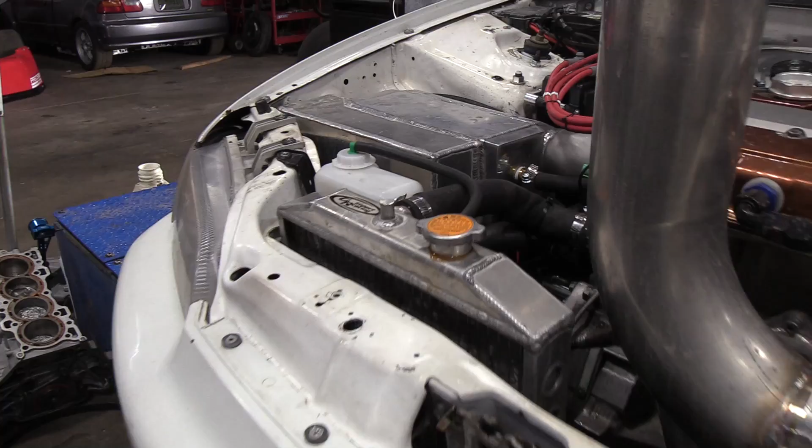Perfect. Like a glove. Yeah, I might as well just throw it in and try it. I mean, what's the worst that can happen? It not work? Oh, that thing's sick. It fits in there perfectly. Yeah, too.

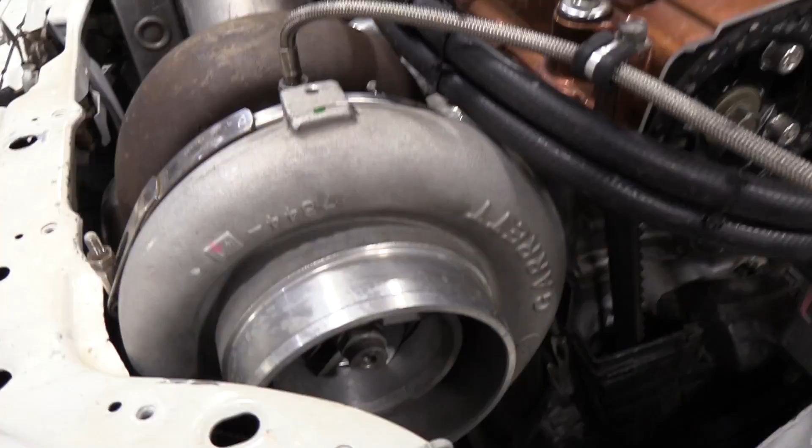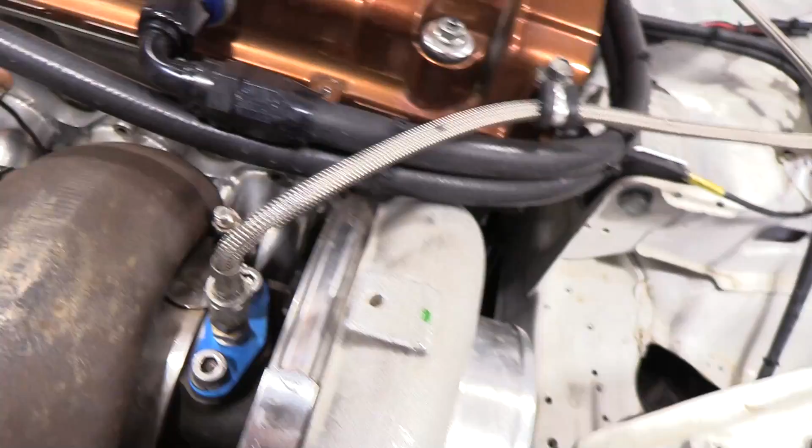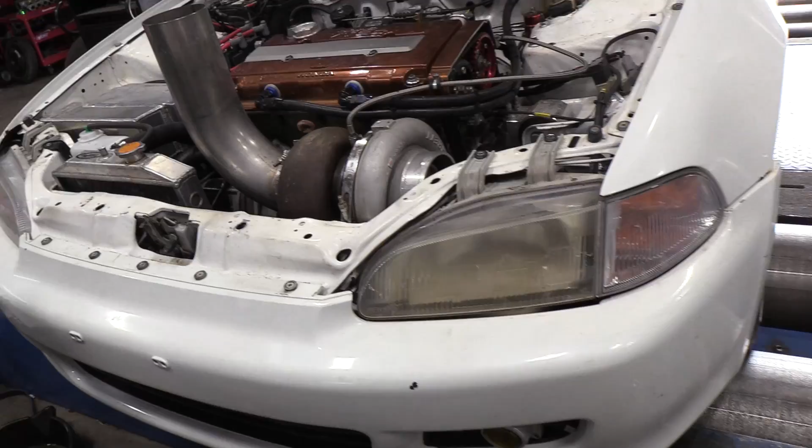I don't think I've ever seen such a big turbo on a top mount like this. If you look right there, you can barely squeeze a piece of paper between the header and the exhaust housing. It's tight, surprised it fit between the block and stuff right here. I had the T1 crank trigger bracket, had to switch to the De La Cruz one. Yeah, I had to clearance the hell out of mine, and I just have a GT35. But mine's in an EF, so I have half as much room from here to the motor. But yeah, that's cool. It's definitely in there, this thing's huge. That's what she said. The power ground. Yeah.

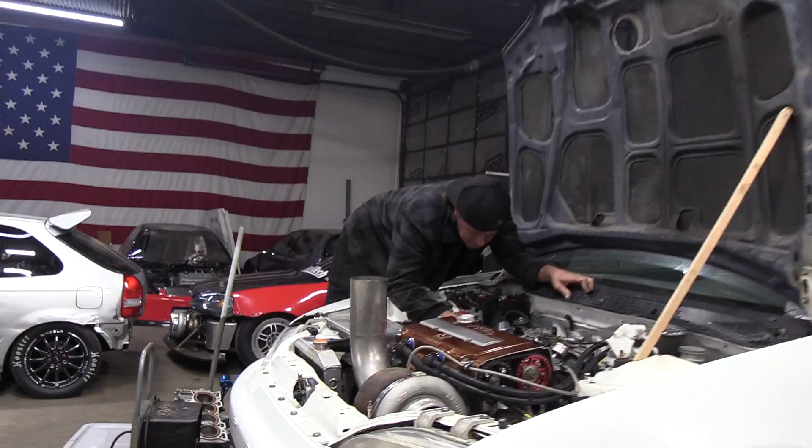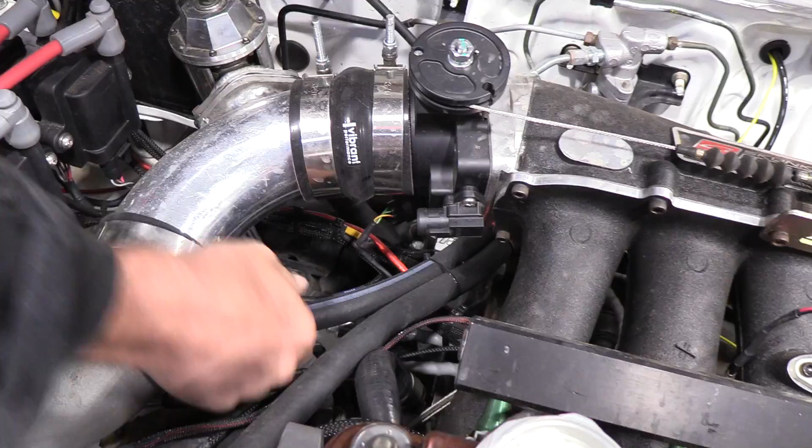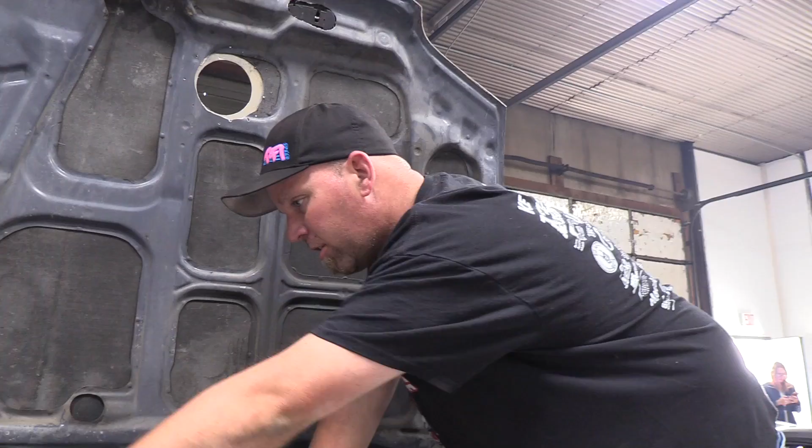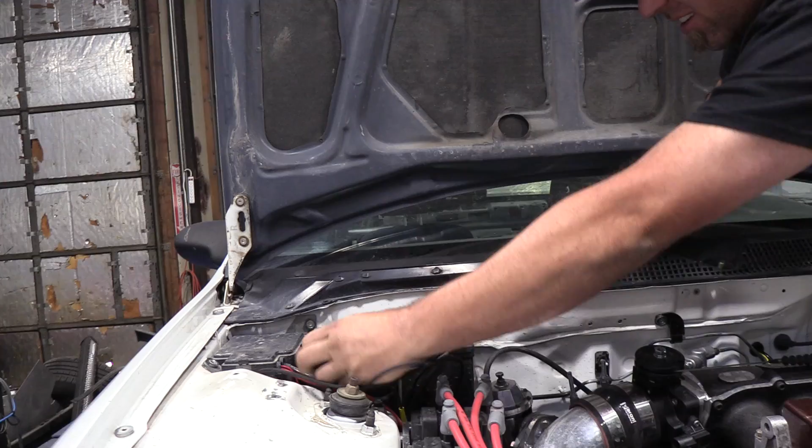What's going on here, bud? I'm looking for the one ground that goes on the engine for the coils normally, not sure where it is. Power ground? Well, these are the ones from... 'Cause I thought the one that says power ground is the one that's supposed to go to there, right? It's going to the battery. Maybe that's what that is? Yeah, because they're supposed to be. So this is only a harness, so it's just one supposed to go to there, and that one needs to go to the motor. The power ground, that's the coil ground that needs to go to the engine, not the battery. Really? Yep, the one that says power ground here, and then the other one says battery ground, I'm guessing. Yeah, battery negative. So the power ground one needs to go to the thermostat. That's where I had it. Yeah, and then I moved it. I did the same thing, I was like power ground, it must go to the battery, but I was wrong too.

What's the setup on this thing to run? Water to air. Oh, you mean motor-wise? It's a RS machine block, 85 millimeter GSR with 3/8 Eagles, 10-to-1 compression, flat face valves, rocker springs and retainers, and it's got a Garrett GT4202R. Big turbo. Brent heard you say that and was like 'what?' Hopefully it'll spool, if it doesn't we'll put a nitrous kit on it, or I'll go smaller. I don't know, it is what it is, but it's cool nonetheless. I'm sure it'll make the power, it'll be a lot of fun. And it's launch high RPM, and it's front-wheel drive.

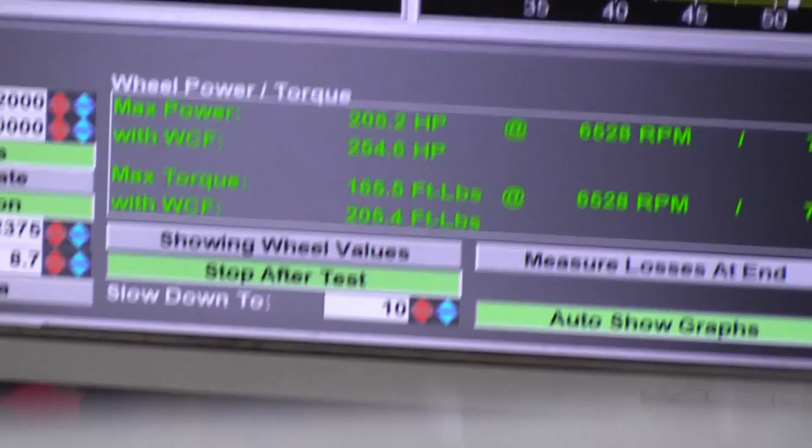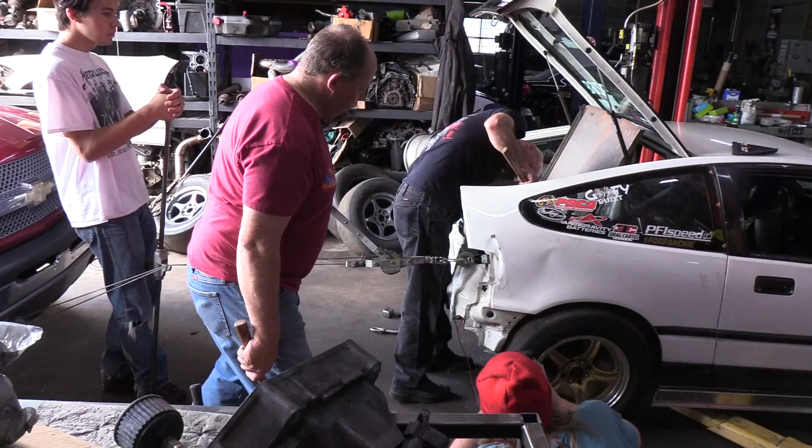Yeah, he is over there. There you go. Yep, all right.

Yeah, she's rolling, we just need to get in this corner here. I don't know if we can, but pretty awesome, we need to get... just throwing fuel in. Was how many pounds, Jamie? 5. 5.

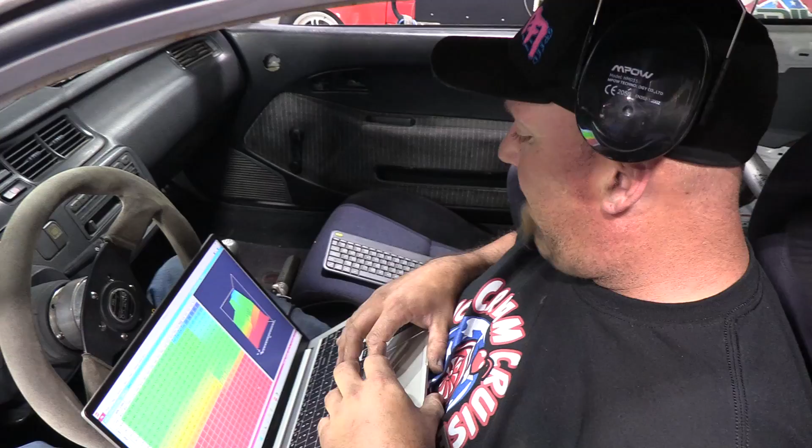There's a guy near me that has a dyno that can do that, and I can just drive it up. 140, so we can start putting some ice in here. All right, let me go get it, 140, back, not bad. Go ice it down. All right, cool.

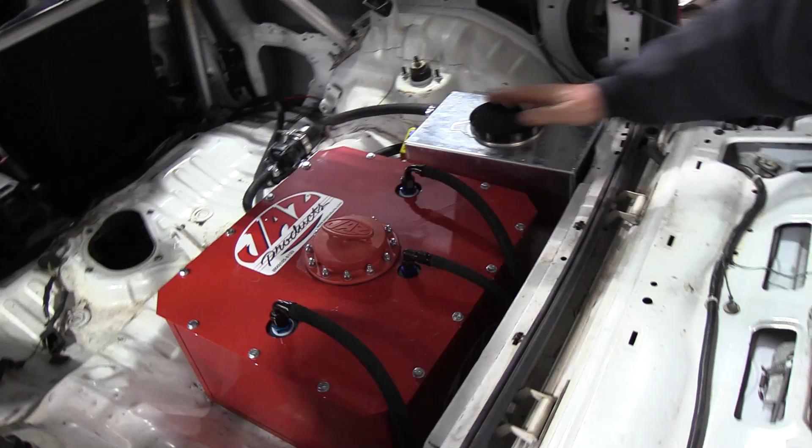It's a clean little setup back here. I'm gonna have to drain some. If we can put a catch pan or something under it. Yeah, that would be cool. Yeah, it's right here. You have a catch pan?

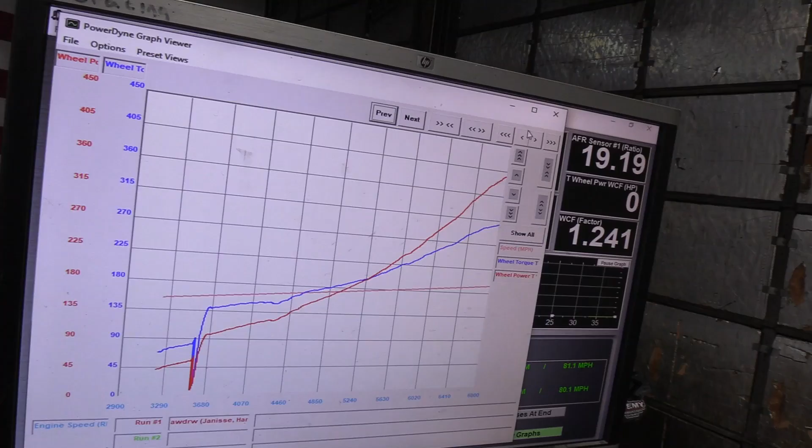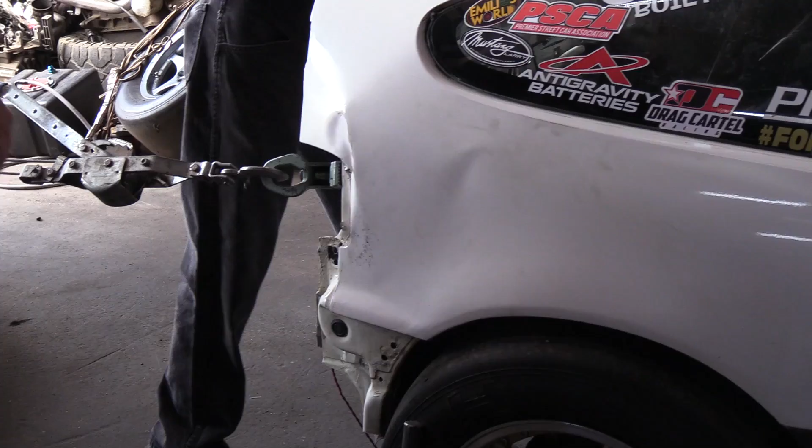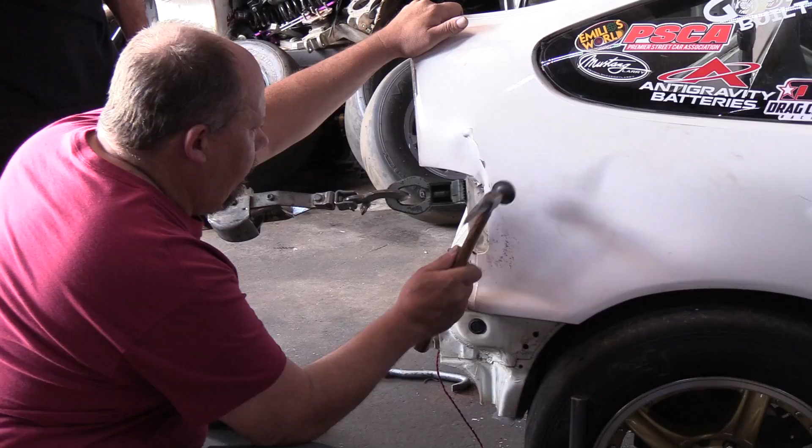All right Jamie, your spark plugs are different. Okay, different kind, different gap. Okay.

Harvey, that's getting it. It's getting better. Yeah, I think so, it sounds good. Yeah, it does. Oh yeah. Let's go, boys.

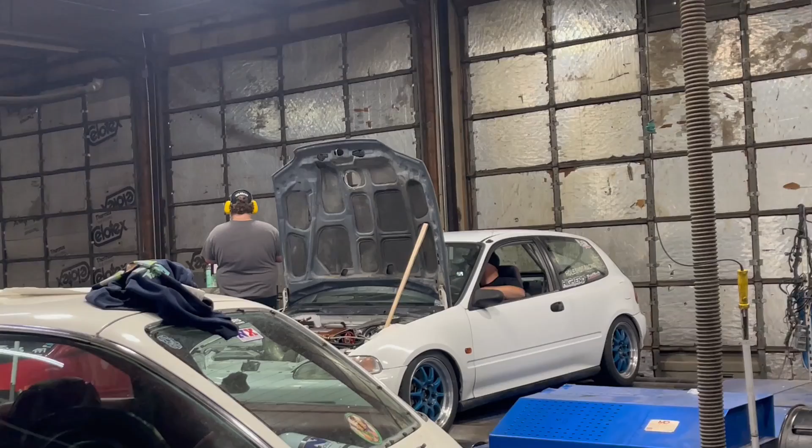What do you make, Gordo? Woo! 553, 16 pounds, you said? Yep, 553. Nice, yeah dude, I'm loving this thing. Yeah, that was a good rip.

Yeah, I'll feed it a little more. I want to see like 20 pounds of boost. He said something about the rods, Eagle something, specified the size. I think he was talking about the rod bolts, 3/8 Eagle or something like that.

Batman to the rescue again. So rad, there we go. A little better, I think it would if I wanted it to.

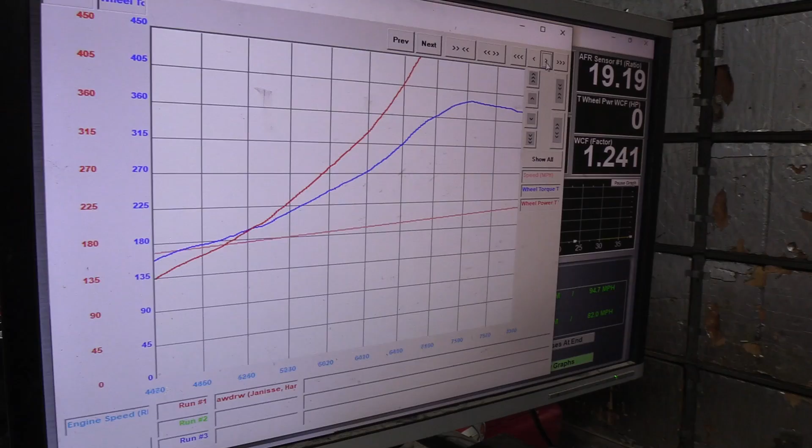That's what I wanted, 20 pounds? 20 pounds. That's 89. Big turbo, that's why I stretched it. That's 19 pounds.

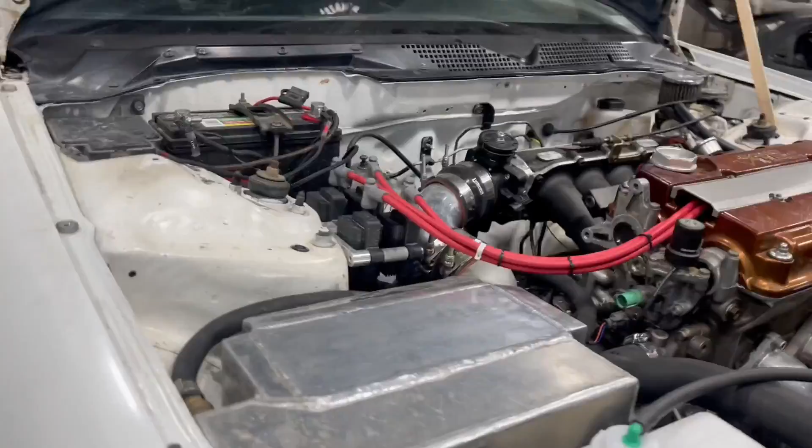Yeah, almost done spinning, 10 minutes later. Oh, it's an old air-to-water intercooler too. So cool.

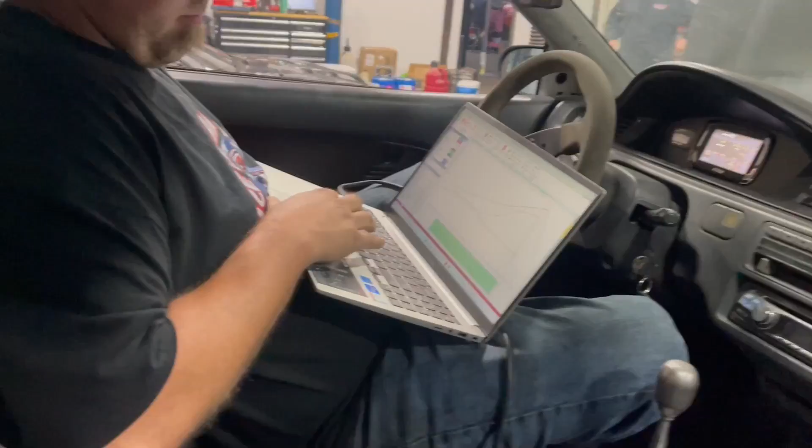609, 388, good job dude. Thank you. 19 pounds, 19 pounds. Can you show me what the graph looks like real quick? Yeah, of course. So he's revving it to 8,900 with this big turbo. It's a 4202. I have the limiter at 9,200 and the shift light at 8,900.

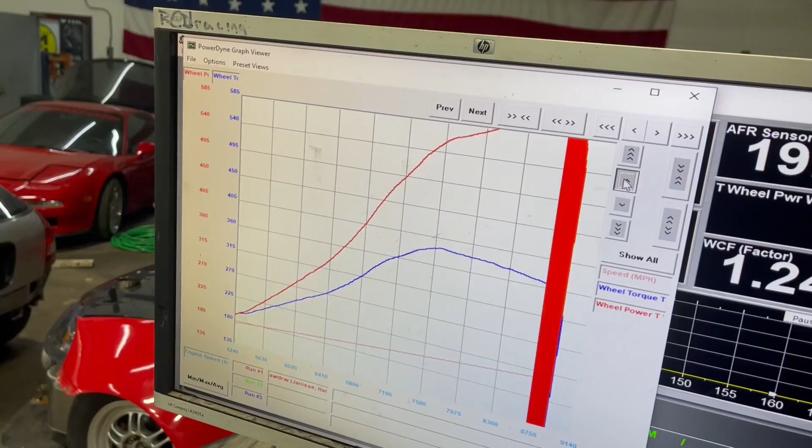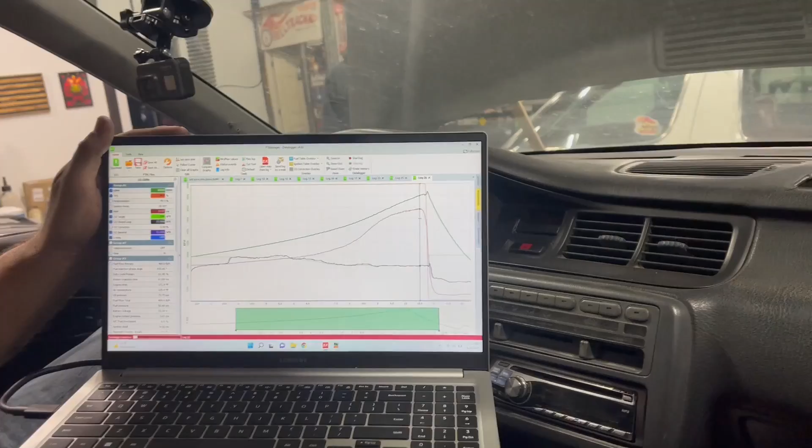Okay, you can see it's just peaking right there, so she's definitely more RPM. Look at the boost curve, and then look at the power curve, it matches perfect. So if we read the same thing at boost, it would be about 634 to 640 at 9,600 probably, because let me double check my limiter and shift light real quick.

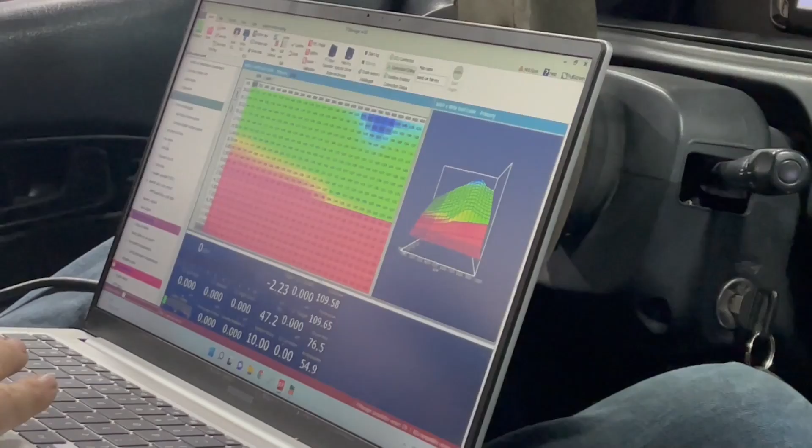The ECU just runs to the FuelTech. So I have 9,200 rev limiter and 8,900 shift light. Because that last 200 RPM, it kind of starts hitting the limit. So we bought this turbo from our friend Tony, who used to run a little 8-second CRX.

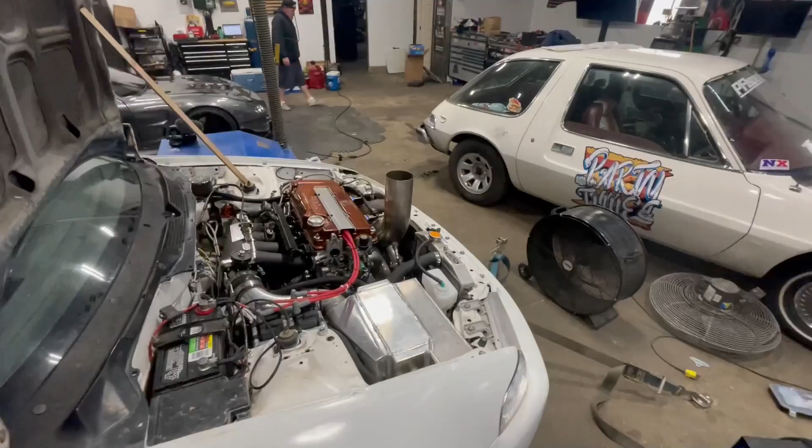Pretty cool little deal, little throwback. But what a unit, man! All-wheel drive, 5-lug, man, what a beauty.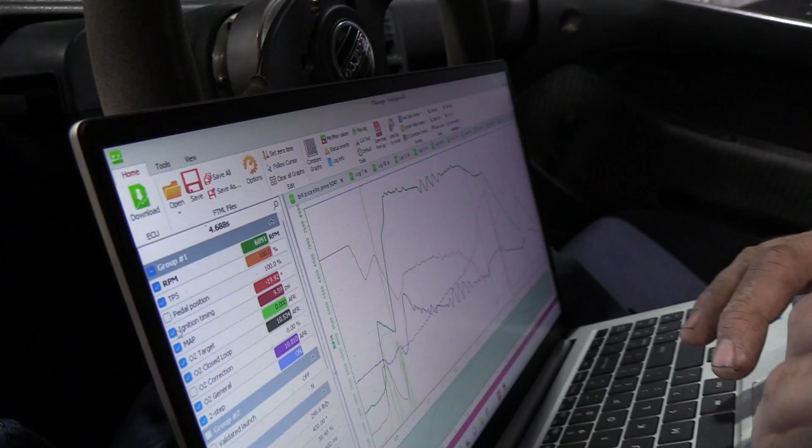See, it makes like nothing, and then... so that's where the timing went. OT, so watch where my timing finally went down there. Okay, so I just gotta play with it on that timing table.

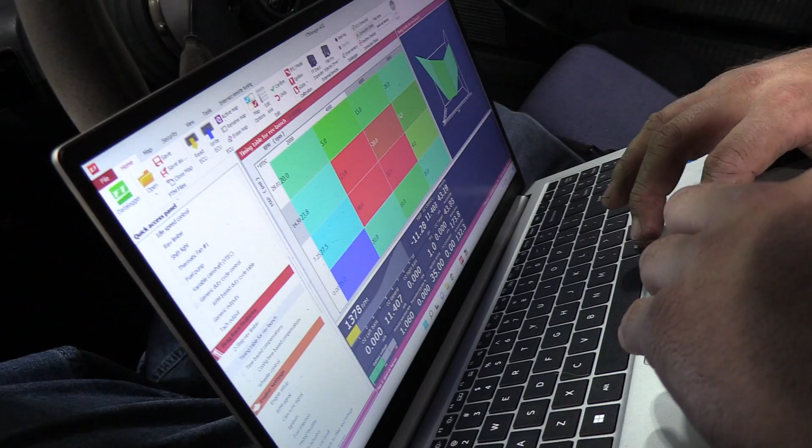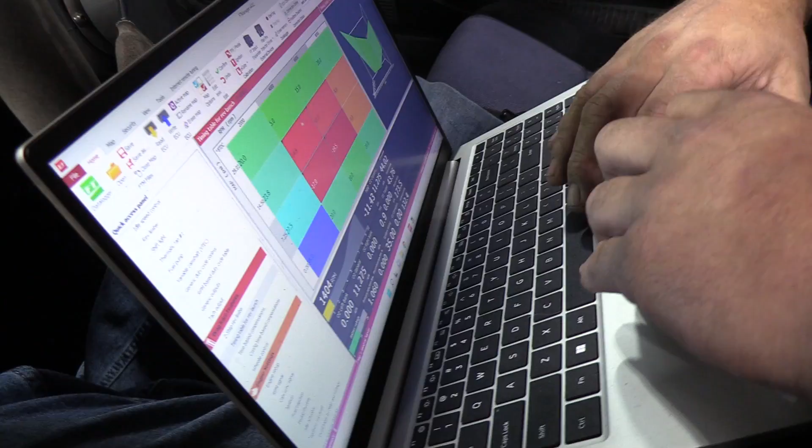Sounds like a jet gonna take off. Yeah.

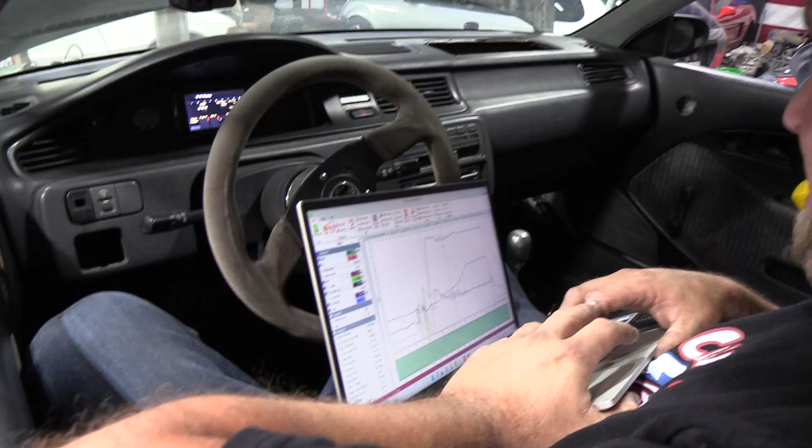Yeah, it's only 10 pounds. So I'll pull it up for you and show you. Try like 7,200 RPM, so just hang there, 9, 10 pounds. Perfect. Air fuel's like 10.2 to 10.8 on it.

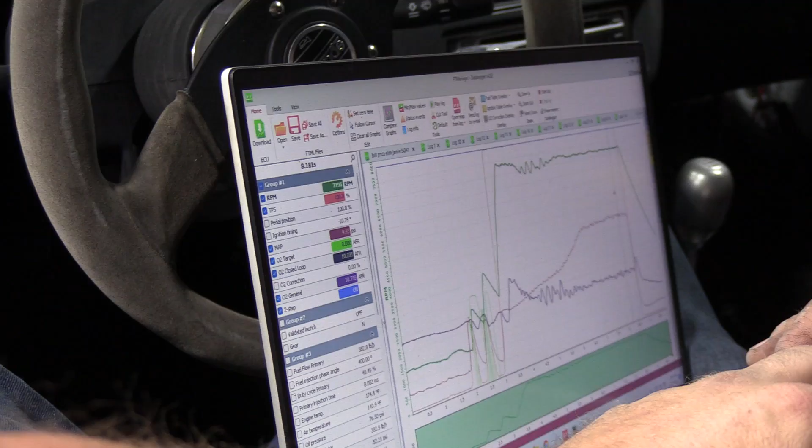Timing's down 10. All you have to do is click this here, and you'll go to the new map. Sweet, for pump gas. Yeah, click it, hit the green button, and good to go.

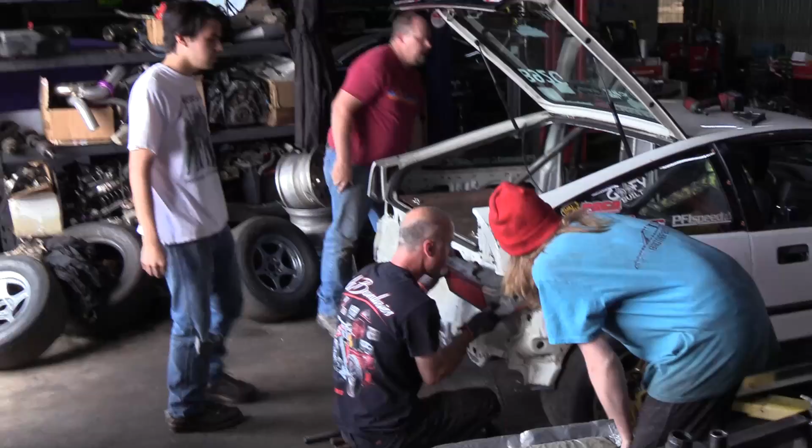Well, you got an even gap over here now, so. Before it was like, yeah, where's your little triangle? Let's see if this is doing pretty better. There you go, good as new.

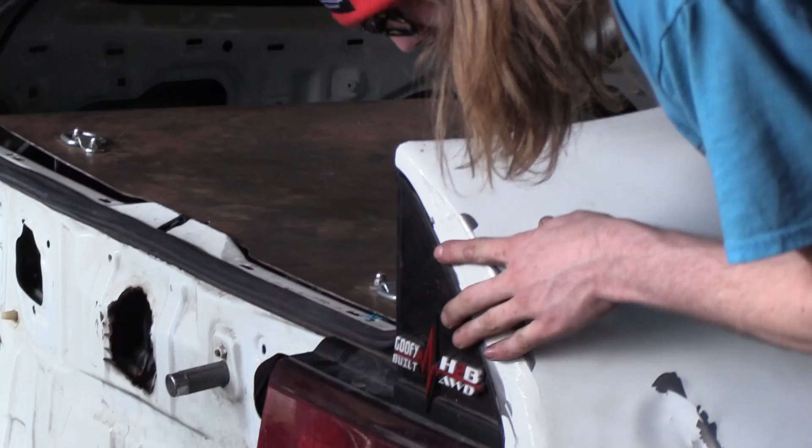Yeah, I mean, that turns pretty straight with it on top. Heck yeah, I mean, when you're ready to finish it, fix it, we can do some more to the sheet metal, but I think the structure is now pretty close to where it should be.

Yeah, oh pull that right there. Yep. Yeah, I was looking at that, and I was looking at this back in here, it still needs to come a little bit, but you got this back where it goes, and this is dead center in here now. If you look in the window here, you can see it. I say I'll put one right there.

So I think once you get it all hooked back up, all your little bits and pieces, I think the structure is going to be fine for you. Thank you, just a little bump. Just a little bump. It's been a while since I got to play bumper cars, so I had to.

Well, you got a pretty neat looking bumper car over here. Yeah, that one's fun.

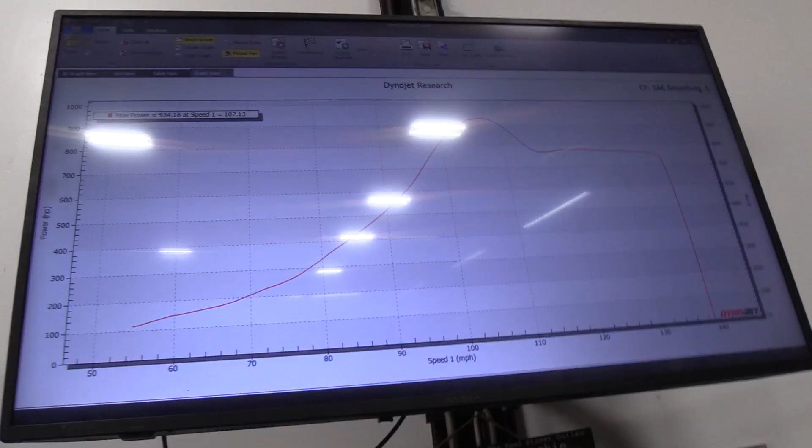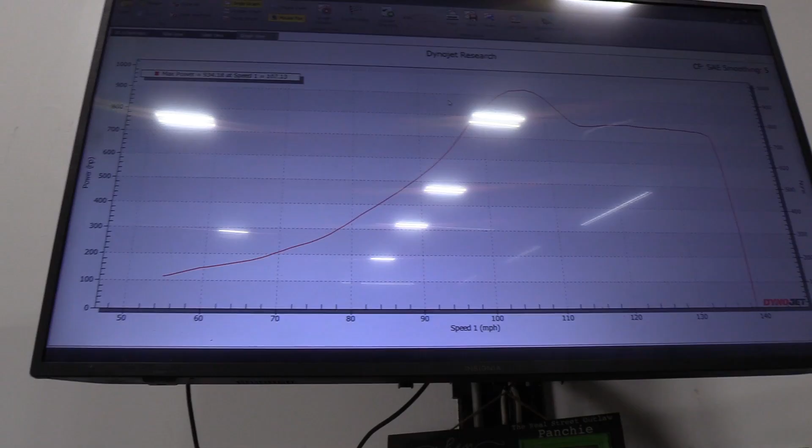Yeah, it's just not accurate. That's not enough. It's not enough, Jeff? No. It went down where it was supposed to keep going up.

What's up? What's up? You want to pet the dead cat? Way too much.

What do you think of that, Harley? Gnarly, dude.

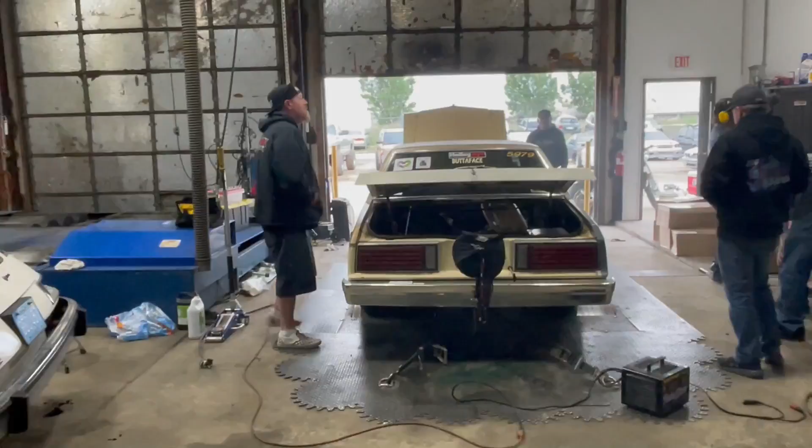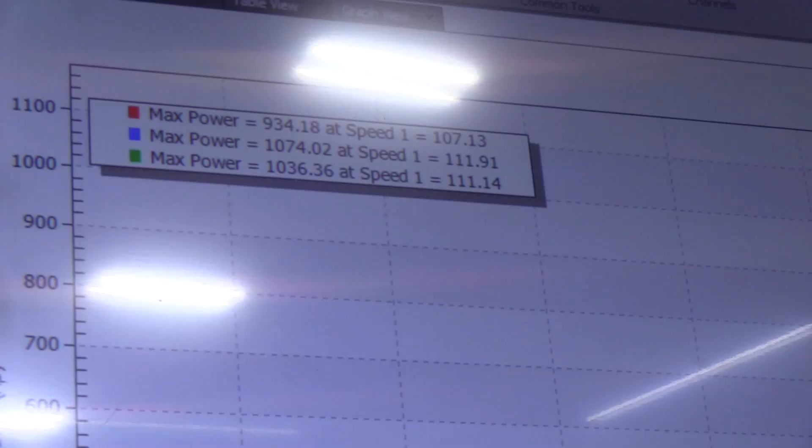We're rubbing? There was smoke there, yeah. Where there's smoke, there's fire.

Watch out. That's awesome. That thing is cool, Zephyr. Ain't much power, so cool.